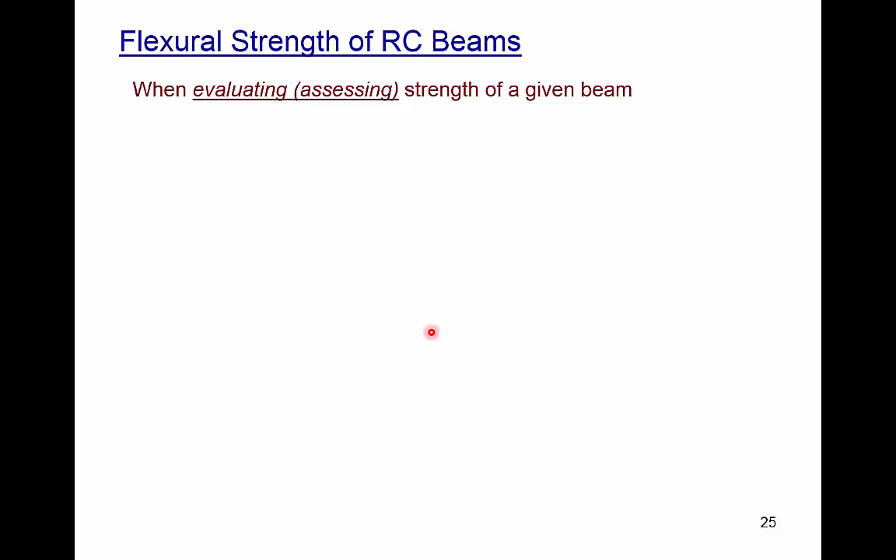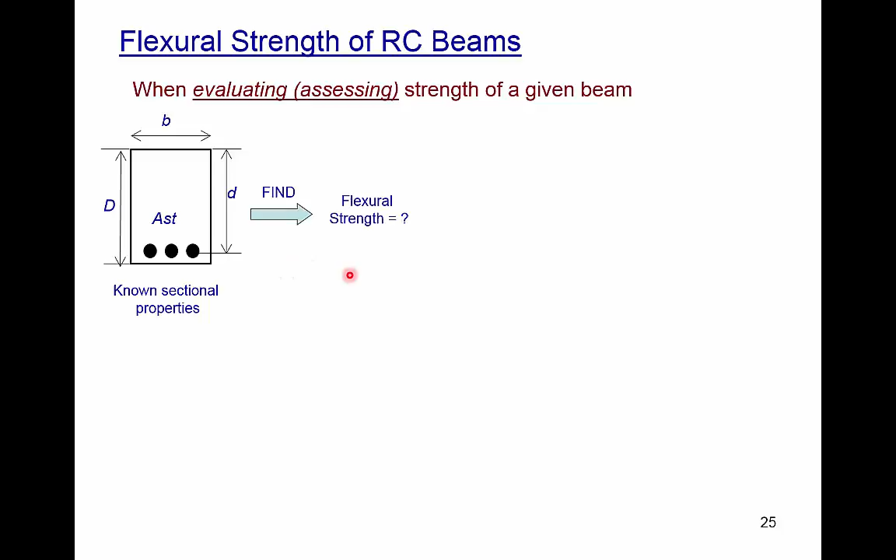As an engineer, you might be facing two kinds of problem. The first kind of problem is that you're assessing the capacity of a given beam. In this kind of problem, you'll be given the dimensions of the beam: the overall depth, width, effective depth D, and the area of reinforcement AST. So you know all the dimensions of the beam, and you are required to find the flexural strength of this beam. We have already seen an example of how to do this, and the steps are that we first assume the type of failure mode, either tension failure mode or compression failure mode, then we check if that assumption is correct or not, and then we find the flexural strength of the beam based on the KU that we calculated.

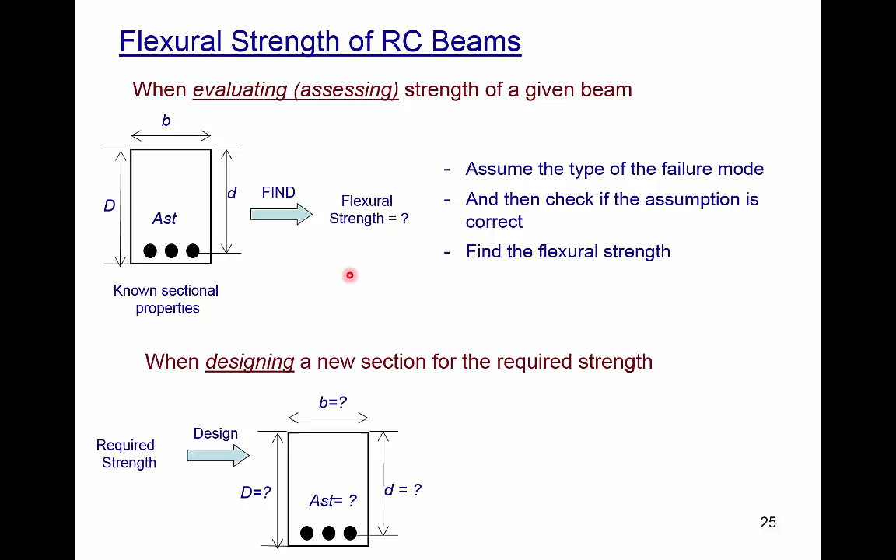The second kind of problem is the design problem. In this kind of problem, we are given the loads acting on the beam, and based on the loads we have to calculate what strength is required for the beam to carry the loads, and based on the required strength we have to design the beam. That means we have to find out the depth of the beam required, the width of the beam, the area of steel required, and the effective depth required. So in this kind of problem, we are given the required strength and we have to find out the dimensions of the beam.

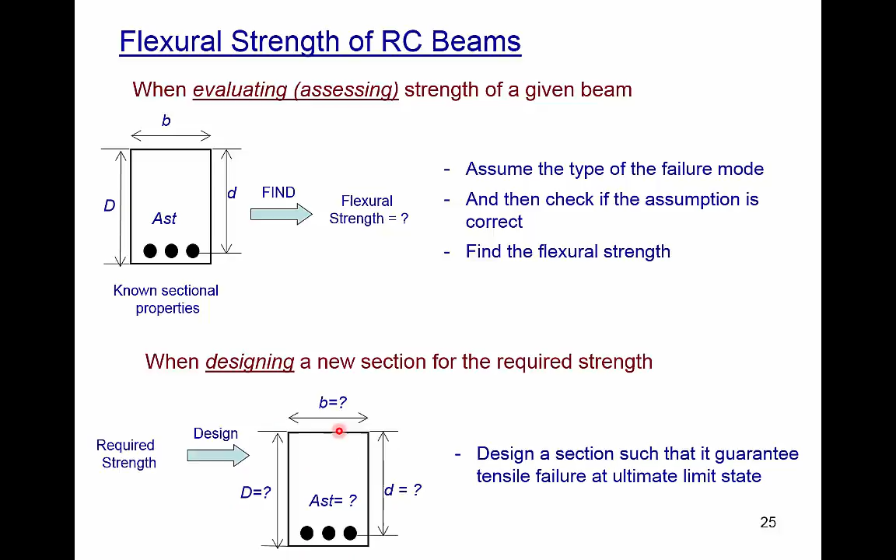So before we go into the design of the beams, there are a couple of things we need to understand, and curvature is one of them. When the beam is subjected to flexural moment, or bending moment, the flexural deformation is often recorded as the curvature of the beam itself. Curvature is basically the rotation per unit length, denoted by kappa. That means kappa is the rotation delta theta per unit length, delta x. Now in this beam, subjected to bending moment M, there is a curvature, that is bending in the beam, defined as delta theta over delta x.

Now if we look into this small element EFGH, we zoom it here. As you can see, because of the bending moment, the topmost fiber EH is in compression, meaning it has shortened a bit, and that shortening is basically the compression strain multiplied by delta x, where delta x is the original length of that element. Similarly, the bottommost tension member FG is subjected to tension, so it is extended here. The original length of this member was delta x, but due to the tensile strain epsilon st, the member is extended to delta x plus epsilon st delta x.

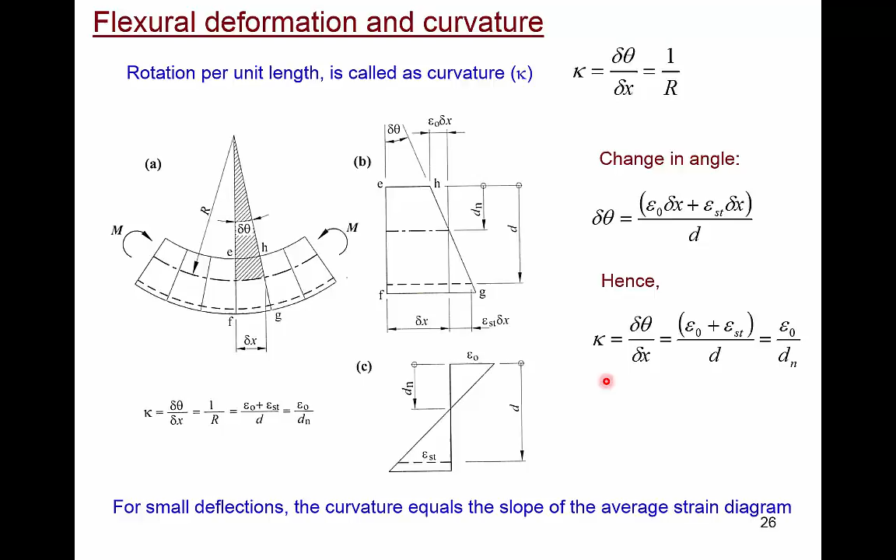This is important to know, this definition of curvature, because we'll be using this definition to define the ductility of the beam. As we've talked about ductility on other occasions, ductility is basically a large deformation that the member can sustain without breaking.

Ductility allows deformation to occur in the member under overload conditions before it eventually fails. We'd want our structures to be ductile because it gives warning to the occupants of impending failure. As we saw earlier, under-reinforced beams are more ductile than the balanced or over-reinforced failure mode, so we want our beams to be under-reinforced.

Now if we draw the moment-curvature diagram of the beam, the beam is subjected to bending moment, and we draw the moment-curvature curve. As you can see, as the moment increases, the curvature increases as well, up to point C, where the crack will occur in the beam. That moment which causes the first crack in the beam is called the cracking moment.

If you further load the beam, it will go into the nonlinear region, and at certain point Y the beam will start to yield. That is denoted by My, the yielding moment, and the corresponding curvature is denoted as kappa Y. If we further load the beam, at a certain point it will fail, corresponding to the ultimate moment of the beam, with corresponding curvature kappa U.

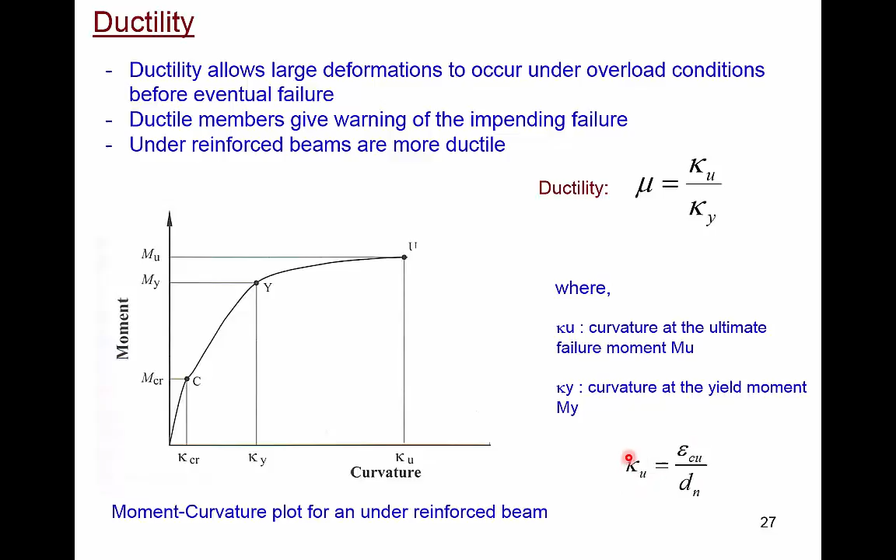Now, to design the beam, we would need to first understand where our reinforcement will be placed in the beam, and it is a very important step.

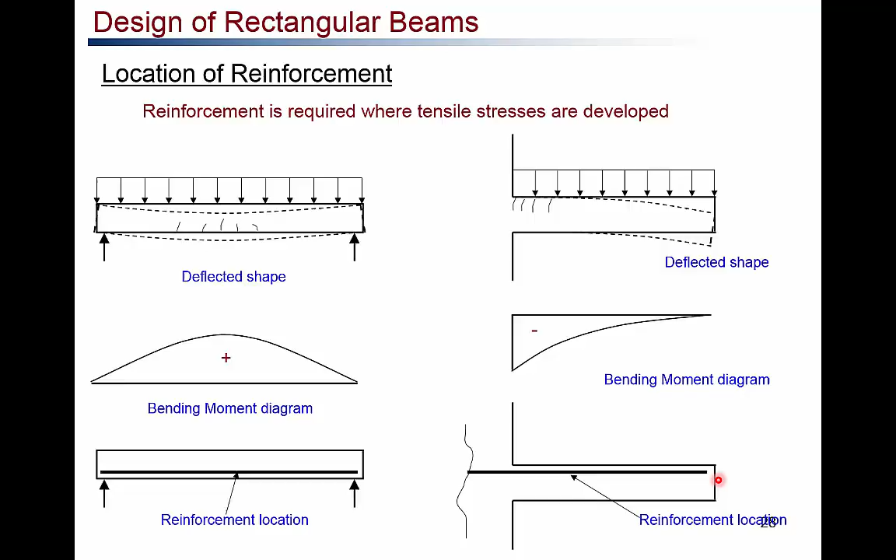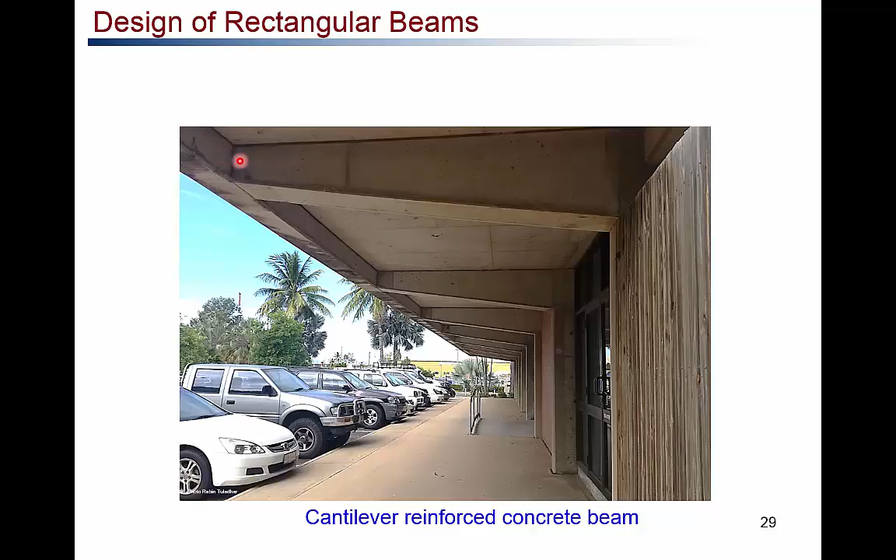Now this is an example of a cantilever beam, as you can see here, there is a cantilever portion here. So the reinforcement for the cantilever beam has to be at the top because there is tension coming at the top. So for this beam, the reinforcement should be at the top.

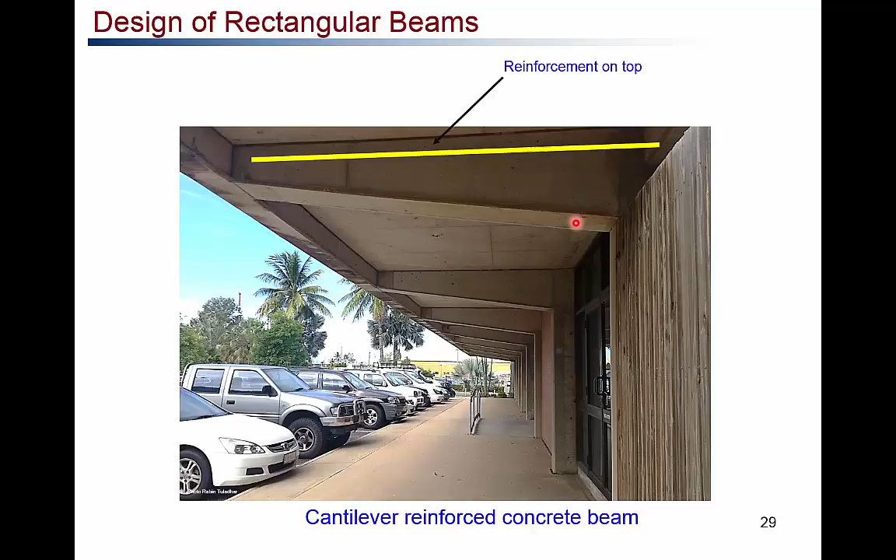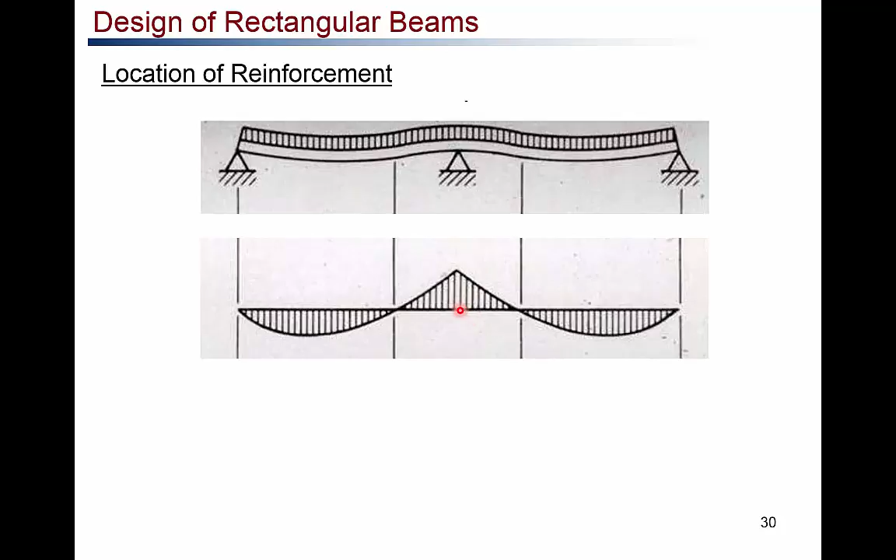So to take that negative bending moment, the reinforcement has to be on top at the middle support, because there is a negative bending moment there. At the mid span here, the reinforcement has to be at the bottom because the tension is at the bottom, and also here the tension is at the bottom, so the reinforcement should be at the bottom. Only at the middle support, where the tension is at the top, should your reinforcement be at the top as well.

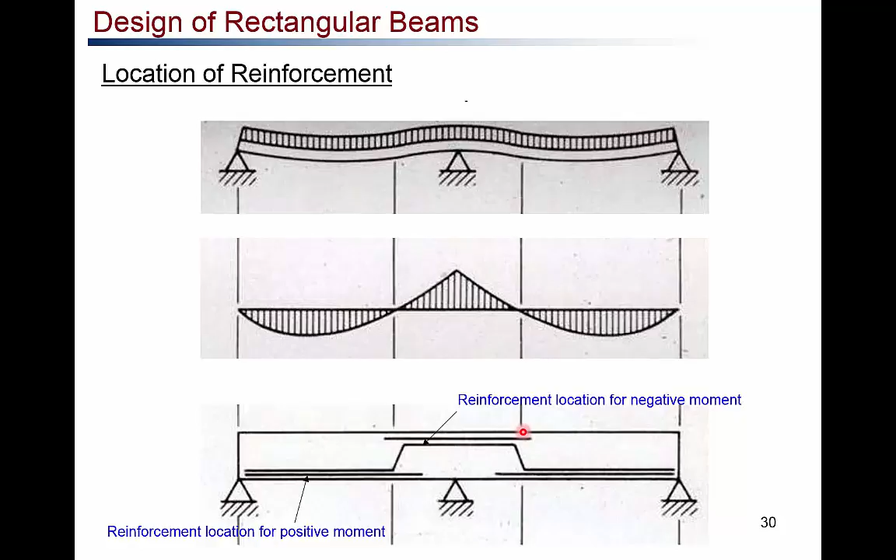Now for the flexure design of a singly reinforced beam, we follow the ultimate limit state design equation. The design strength phi RU should be greater than or at least equal to the factored load effect, S star. If we are concerned with bending moment, it can be represented as phi Mu should be greater than or equal to M star.

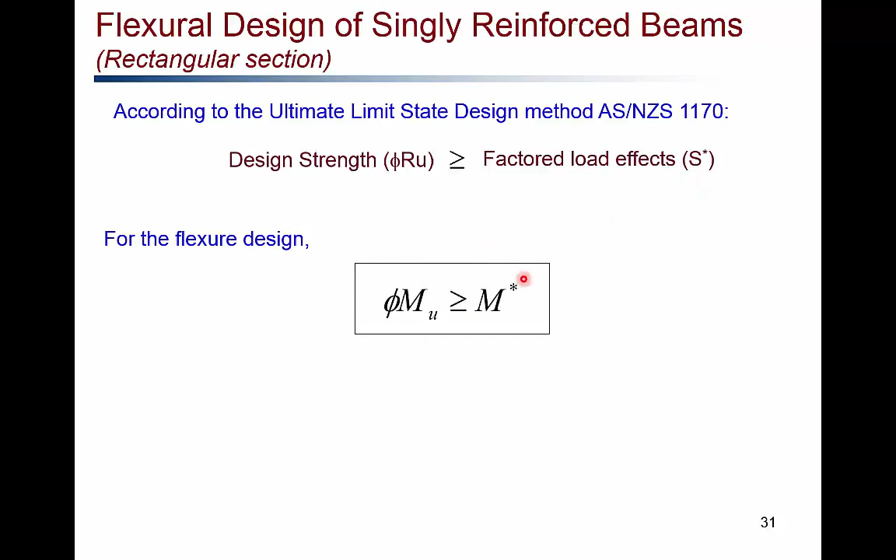In this equation, phi Mu is the design strength, the design bending moment, and M star is the moment demand to meet the given load. So M star is the moment due to the factored load, also called the required ultimate moment or moment demand due to external load. Mu is the nominal moment capacity of the section, and phi is the strength reduction factor, which can be obtained from table 2.2.2 in AS 3600. So phi Mu is the design moment and M star is the moment demand.

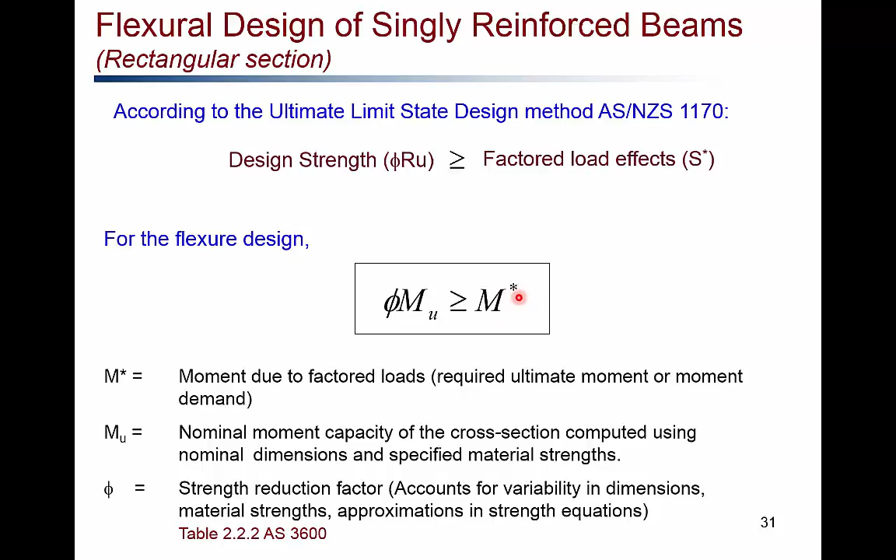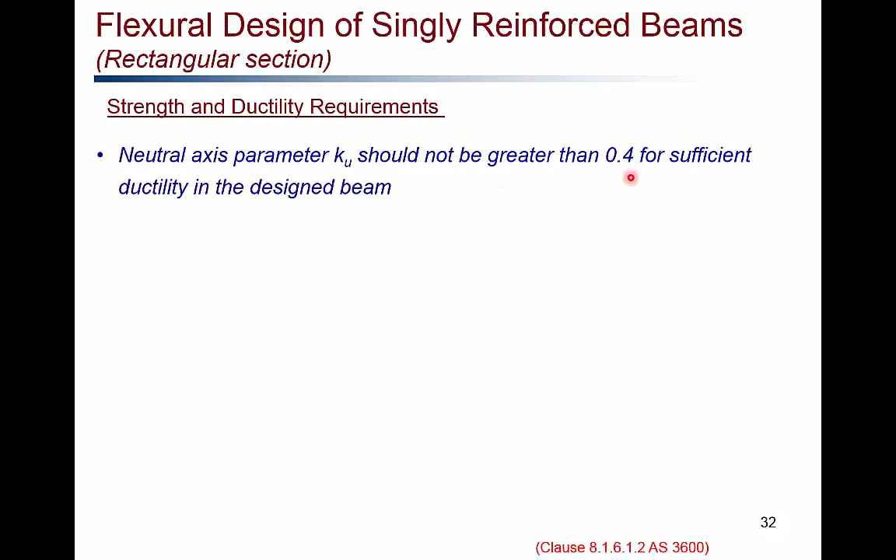When designing a reinforced concrete beam, you have an option to choose the dimension. When you have this option, you will make sure that the beam fails in a ductile manner, that is, in an under-reinforced manner. So you will choose the KU value, the neutral axis depth parameter, smaller than 0.4. If we choose the KU value less than 0.4, we can ensure our beam fails in the under-reinforced or tension failure mode, which is a ductile failure mode.

But usually, to be on the safer side and to make the section more economically efficient, for design we usually limit the KU value between 0.15 and 0.3.

Also, when designing a reinforced concrete beam, we have to make sure there is enough reinforcement. AS 3600, the design code, prescribes the minimum amount of reinforcement as well. AS 3600 clause 8.1.6.1 prescribes that the ultimate bending moment has to be at least greater than 1.2 times the cracking moment.

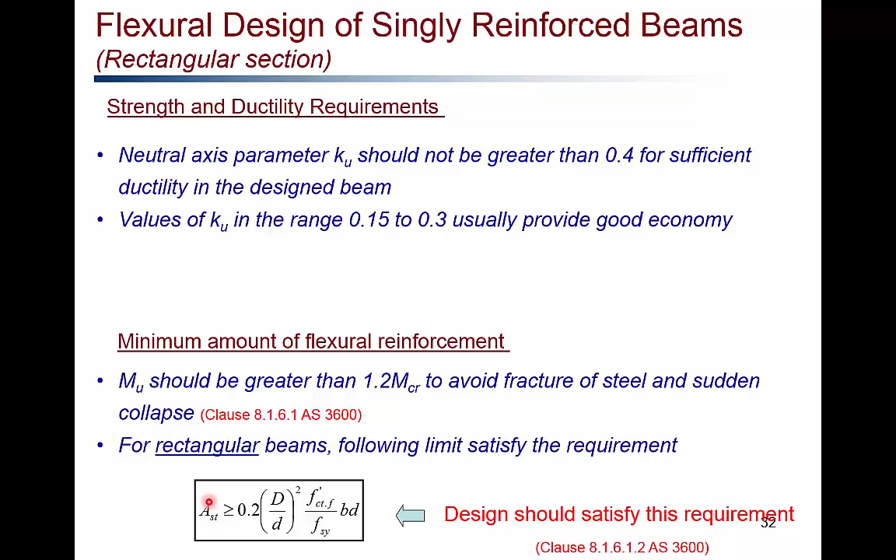This is given in clause 8.1.6.1.2 of AS 3600. In this equation, AST is the total or minimum area of reinforcement required in the beam. Capital D is the overall depth of the beam, small d is the effective depth of the beam, f-ct.f is the tensile strength, fsy is the yield strength, and B and D are again the dimensions of the beam. So the area of reinforcement you provide in the beam should be at least greater than this value.

Also, as we saw earlier, the durability requirement prescribes some minimum effective cover and minimum characteristic strength as well. AS 3600 table 4.10.3.2 prescribes the minimum characteristic strength fc and cover values for different exposure conditions. For example, for a B1 exposure condition, the minimum concrete strength required is 32 megapascal, and the minimum clear cover required for the beam is 40 millimeters.

What clear cover means is that the distance of the reinforcement from the soffit of the beam, the base of the beam, should be at least 40 millimeters. If you add half the diameter of the bar, you get the effective cover required for the B1 exposure condition. Similarly, for B1 exposure condition, when using 40 megapascal concrete, your minimum clear cover required is 30 millimeters.

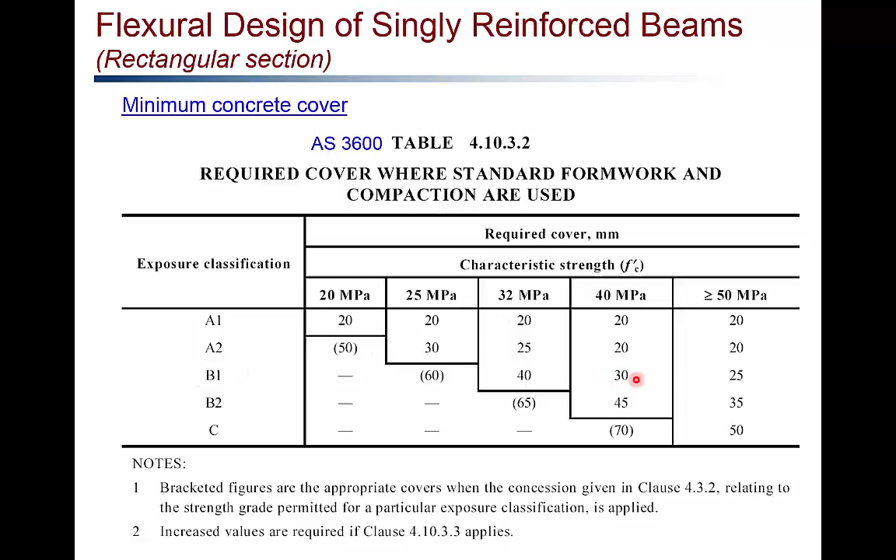Now, when you are designing a single reinforced beam, first you have to draw a stress, strain, and force profile like this one. So this is the dimension that you want, and AST is the area of the steel required. This is the stress profile and the force profile.

Now the ultimate moment of this beam can be obtained by taking a moment about point T in this force diagram. As you can see, the ultimate moment can be obtained by the compressive force C multiplied by the lever arm Z. So here the ultimate moment Mu equals the compressive force C multiplied by the lever arm Z. And we know that the compressive force is the integration of this equivalent stress block, which is alpha2 FC dash multiplied by gamma ku d over 2 gamma ku d, multiplied by B, that is C.

This gives the total compressive force. And the lever arm Z is basically the effective depth of the beam minus this small portion, represented by gamma ku d over 2, which is given by here. So your ultimate moment is given by this equation, which we are familiar with already.

Now for the design moment capacity, you have to multiply this Mu with phi. So from the ultimate state design equation, it says that phi Mu should be at least greater than or equal to M star, the moment demand. Putting back the value of Mu into this equation, we can simplify it down to here, which will give us BD square should be at least greater than this parameter.

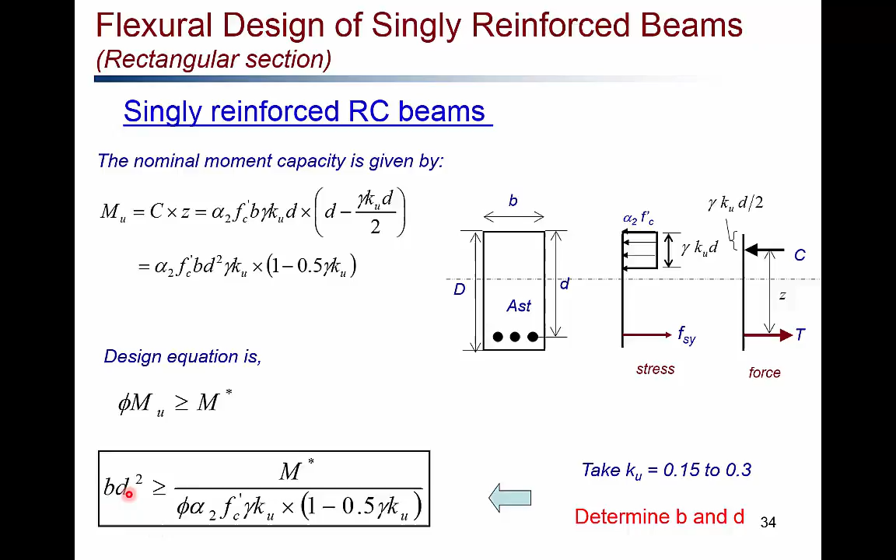So once you estimate the B and D for the beam and the Ku value as well, then you can find the area of steel using the horizontal equilibrium of the forces. That is, the tension force should be equal to the compression force. Again, the tension force is equal to AST multiplied by FSY, because we are choosing the Ku value less than 0.4, so definitely it is a tension failure mode.

So we can use stress in the steel as FSY. Now again, this is the compressive force in the beam. So from this equation, we can find what is the area of steel required. So all of these parameters are known, so we can find out what is the area of steel required for that beam.

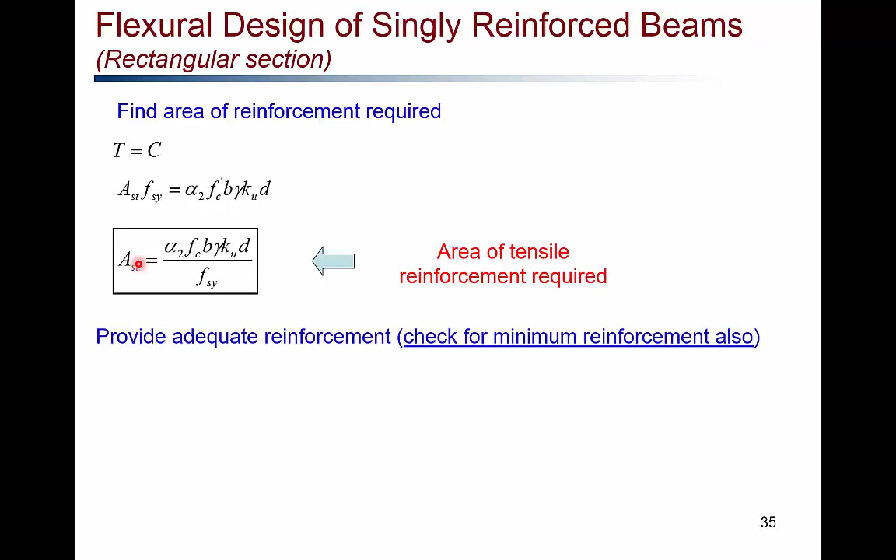So provide that area of steel required in the beam, but we have to make sure that the dimension, the diameter of the bar you chose, are available in the market as well. So with reference to the bar diameters available in the market, you will choose the number of bars to meet this area requirement.

And you also have to check for the minimum reinforcement that is required. So as I mentioned earlier, once you find the area of steel, you have to make sure that area of steel is at least greater than this value prescribed by the code.

Once you find the area of steel and the dimension of the beams, the final step remaining is to check the design. So we have provided the area of steel. Using the actual value of area of steel, now we can find out the actual value of Ku. And then we have to check whether our assumption that it is a tension failure mode is correct or not.

So you check the strain in the steel and make sure that it is greater than 0.0025, that is the yield strain of the steel. Once it is proved okay, then we can proceed to find out what is the design moment capacity, that is phi Mu, and we have to ensure that phi Mu is greater than or equal to M star is satisfied.

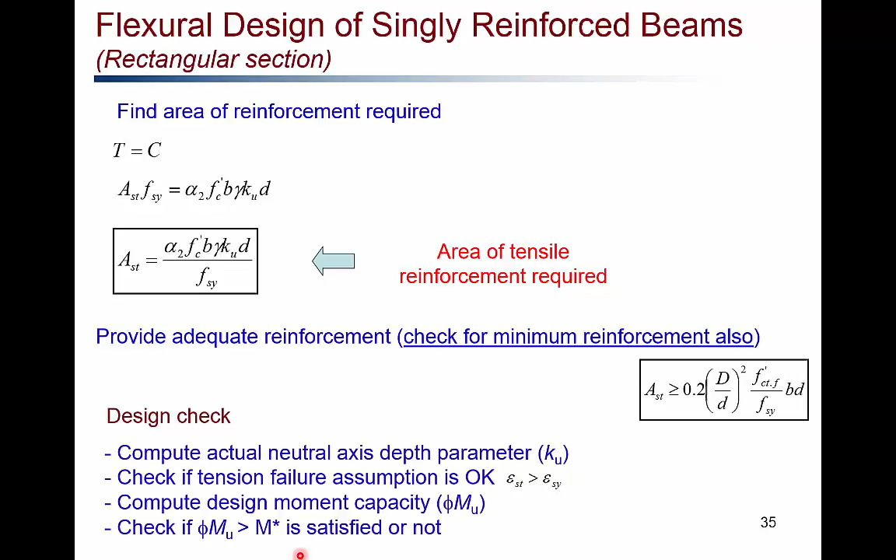So to summarize once again all the design steps: step 1, you have to find first the moment demand M star based on the factored loads that you have on the beam.

Secondly, you will choose a Ku value between 0.15 to 0.3 to make the beam fail in the tension failure mode, or the under-reinforced failure mode.

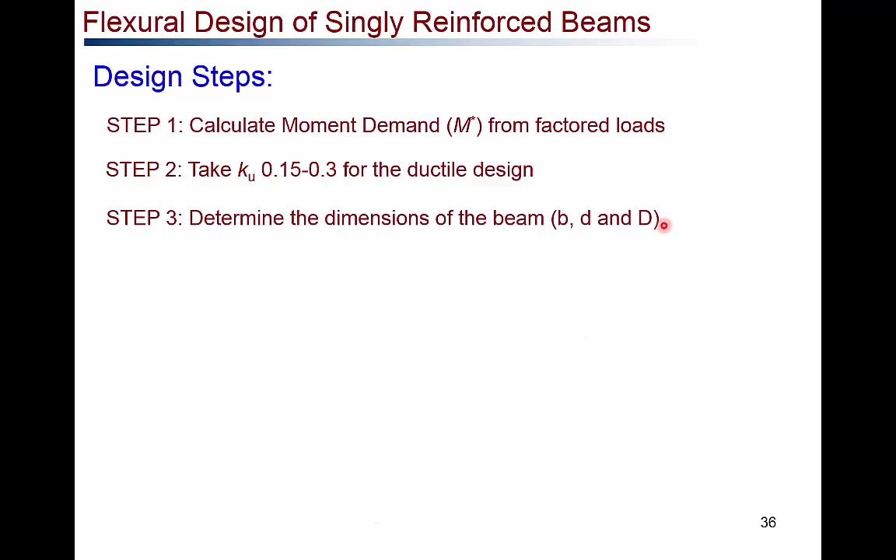Step 3, based on the value of Ku you chose, find out the dimensions of the beam, that is the width of the beam, the effective depth of the beam, and the overall depth of the beam using this equation. So using this equation you can find B and D once you take the value of Ku between 0.15 to 0.3.

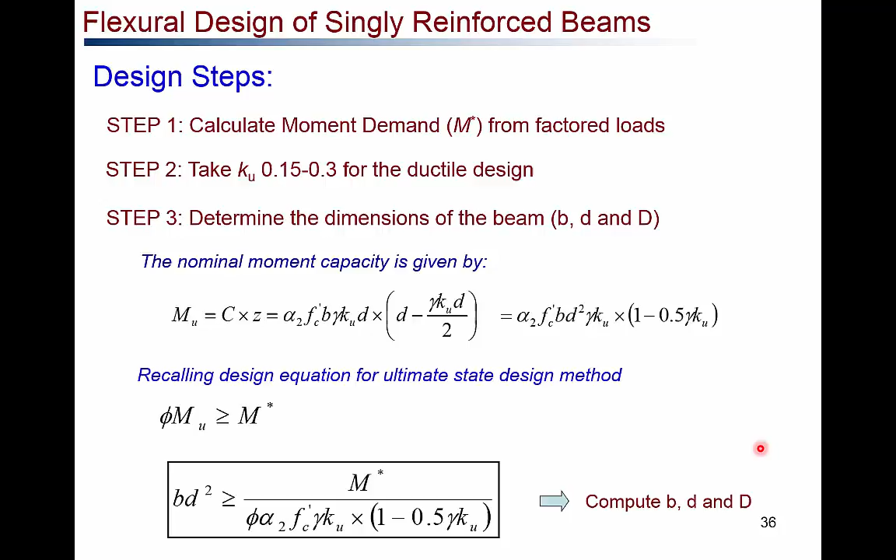Once you find B and D, you can compute the area of steel required, that is step 4. That can be done by equating the tension force equal to the compression force. From this equation you can find the area of steel required.

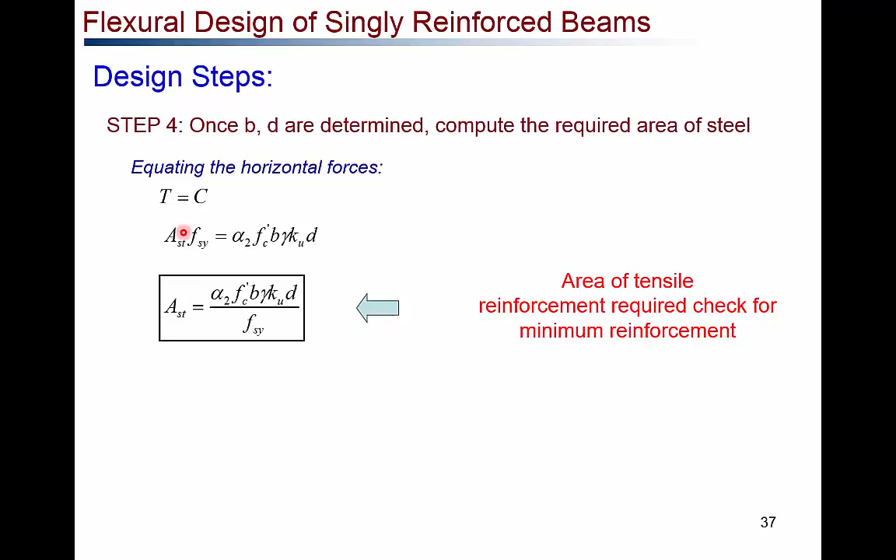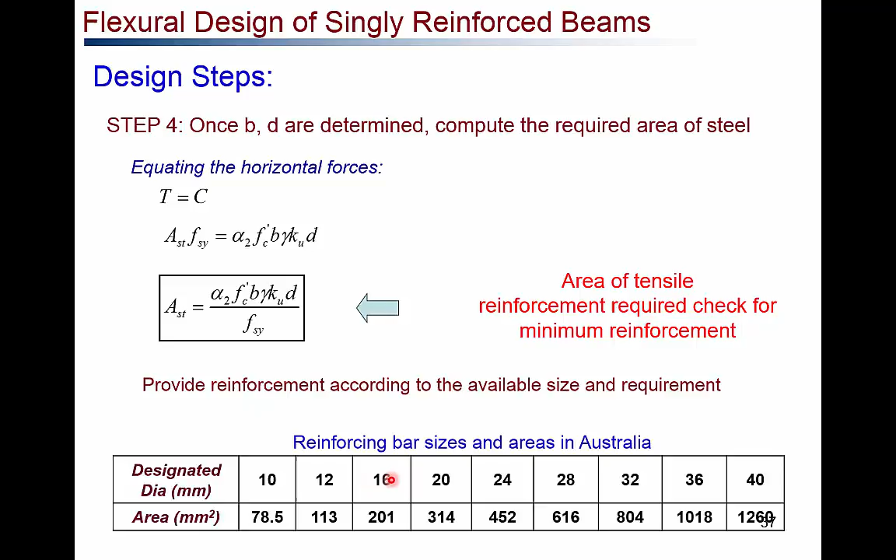Once the area of steel is required, you check the number of bar diameters available in the market and find out how many of these bars are required to meet this area of steel.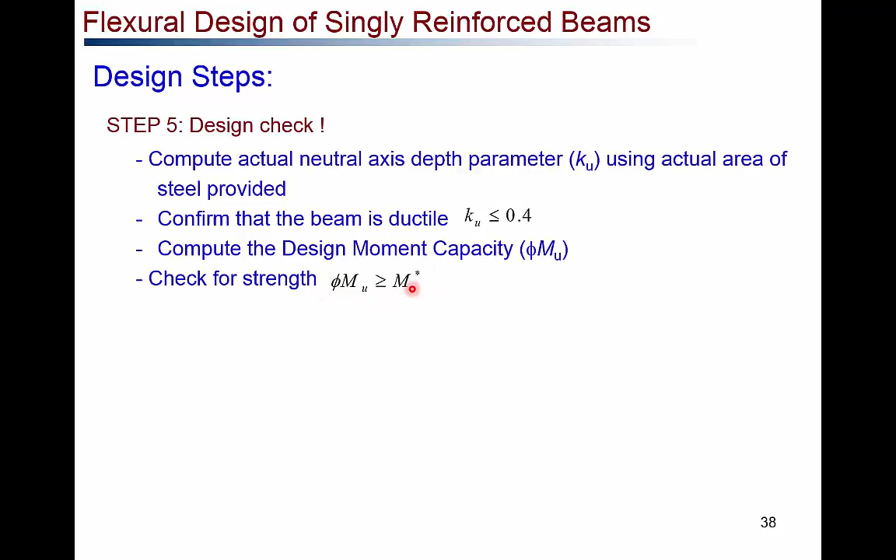The final step, as I said, is to check the design. That means using the actual area of steel that you have provided, find out the neutral axis depth parameter Ku and ensure that Ku is still less than 0.4, and then find out the phi Mu factor, that is the design moment capacity, ensuring that phi Mu is at least greater than or equal to M star.

The final step remaining is to draw the dimensions of the beam as you calculated. So you have found B, overall depth D, the effective depth D, and the area of steel. You have to draw the cross section as well as the elevation of the beam.

Now, in this example, what we have seen is that we were given the moment capacity required, that's M star, and using that M star we designed the beam, that is we found out B, D, and As. So we have the freedom to choose D and the width of the beam and the area of steel in this case. But sometimes...

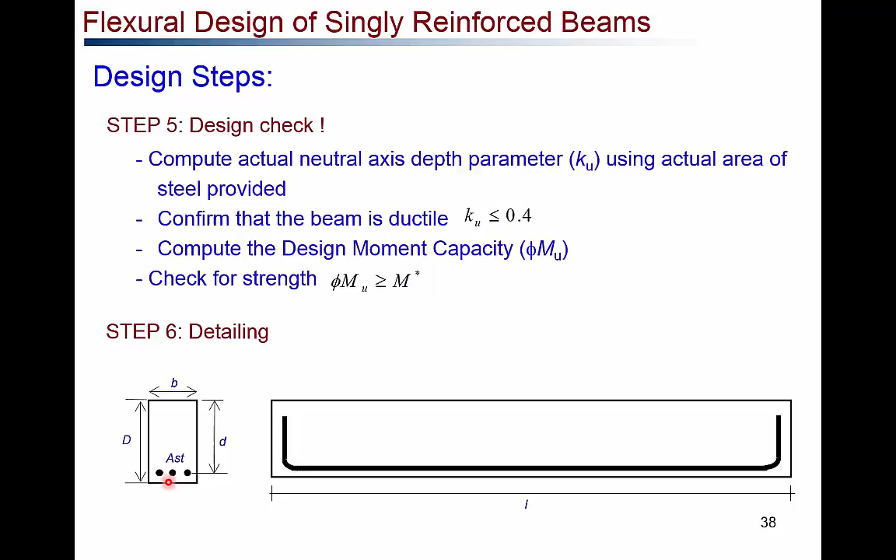B and D, that is the dimensions of the beam, can be fixed by other considerations. For example, for a car park, the architectural requirement can fix the depth of the beam so that there is enough clearance for the cars to come in. So in that case, B and D, the width and depth of the beam, are already prescribed to you.

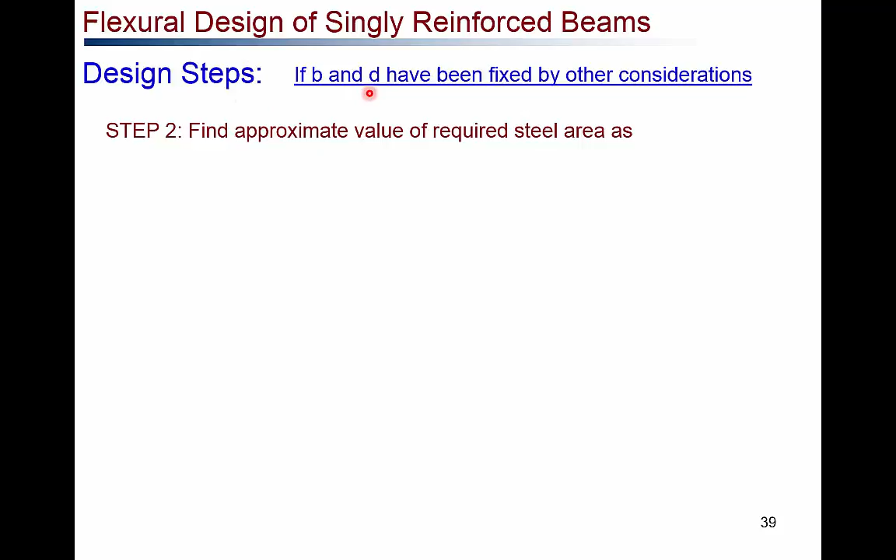In that case, what you do is proceed by finding out the approximate area of steel, because B and D are already given to you. So you find the approximate area of steel required and then proceed to design the beam.

So in this equation, to find the ultimate moment capacity, we know you can take a moment about point C. So the ultimate moment capacity is the tension force T multiplied by the lever arm Z. And the tension force T is nothing but the area of steel multiplied by the yield strength of the steel, that is 500 megapascal.

Now for this lever arm, because we do not know the Ku value here, we can simplify it as 0.85 times the effective depth of the beam. This is just an approximate value; we will calculate a more detailed value later on. So to start with, we can use Z, the lever arm, as 0.85 times the effective depth D.

So if you put Z as 0.85 times effective depth D, you know everything in this equation, and you can find the area of steel required. The area of steel required is M star over phi Fsy into 0.85 D, which is Z here. This gives you the approximate area of steel required.

Once you find the area of steel required, you can check if the Ku value obtained using that area of steel is less than or equal to 0.4 or not. If you ensure it is less than 0.4, then you have a ductile beam, and there is no issue with that.

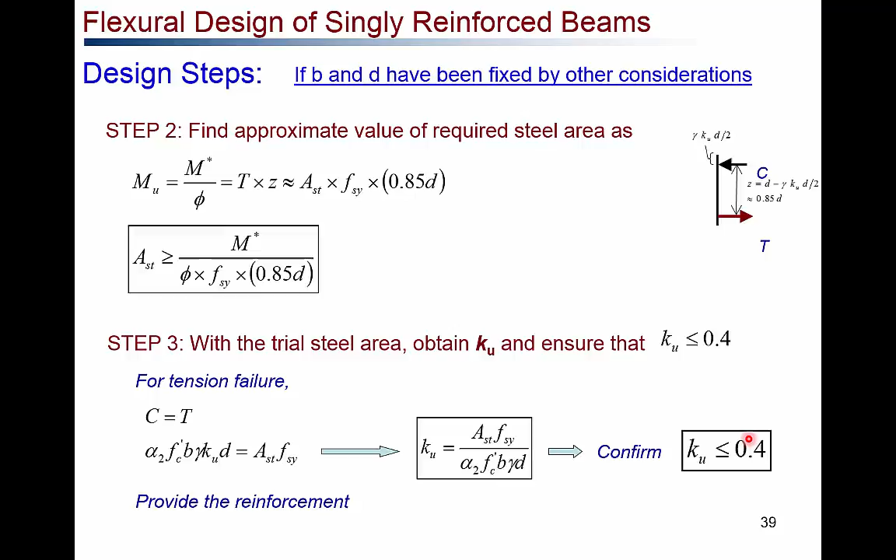Now, if Ku exceeds 0.4, because B and D are already fixed for you, you calculate the value of Ast required from the moment perspective, and when you find Ku, you find that it is greater than 0.4. That means it is going into the brittle failure mode, or the overly reinforced member section. So in that case...

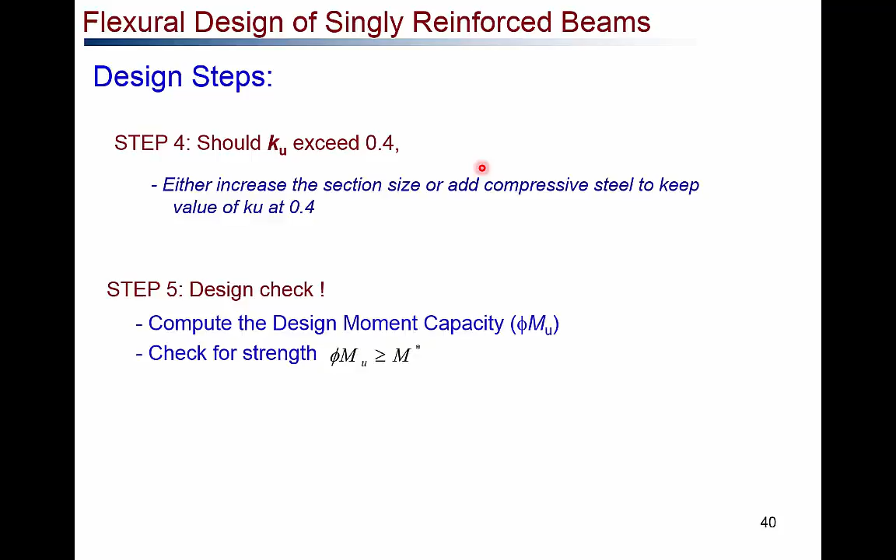You can change the dimension of the beam, which is restricted in this case, but the other thing you can do is go for a doubly reinforced section. That means you provide reinforcement not only at the bottom but at the top as well. This will improve the ductility of the beam, changing it from the compression failure mode to the tension failure mode. Finally, you need to do the design checking, find the actual value of phi Mu, and ensure that phi Mu is greater than or equal to M star. Detailing is also required.

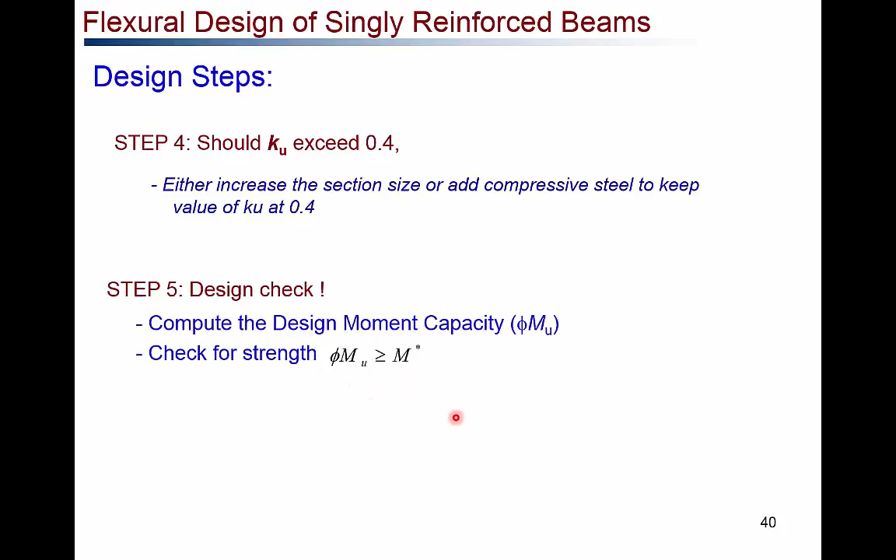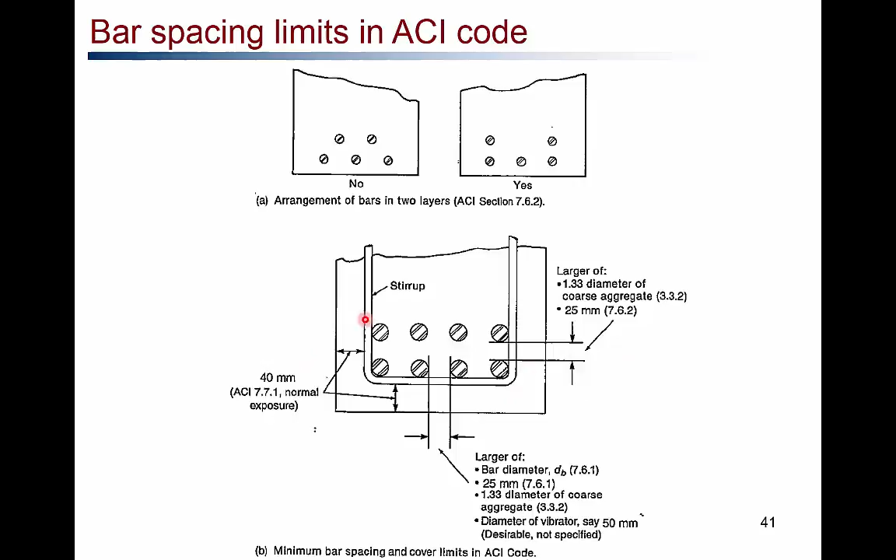The code also prescribes that the minimum distance of the steel from the side of the beam should be at least 40 millimeters. If you are using two layers of bars, the clear distance between them should be at least 1.33 times the diameter of the coarse aggregate, to ensure the aggregate can pass through, or 25 millimeters, whichever is larger. These are the specifications from the American Concrete Institute code.

Now for the Australian code, it prescribes that the clear distance between reinforcement bars should be at least greater than 2 times the diameter of the bar used. So if you are using 20 millimeter bars, the clear distance between the bars should be at least greater than 40 millimeters.

The code also prescribes, for crack control of beams, the maximum distance of the reinforcement from the bottom and sides of the concrete. AS3600 prescribes that the distance of the center of the reinforcement from the bottommost fiber of the concrete should be less than or equal to 100 millimeters. Same from the side as well, the distance from the side of the beam to the center of the reinforcement should be a maximum of 100 millimeters.

Again, for crack control, the center-to-center distance between reinforcement bars should be less than 200 millimeters. So instead of just providing two large bars to meet the required area of reinforcement, you are better off putting a larger number of bars well distributed throughout the beam, to control cracks as well.